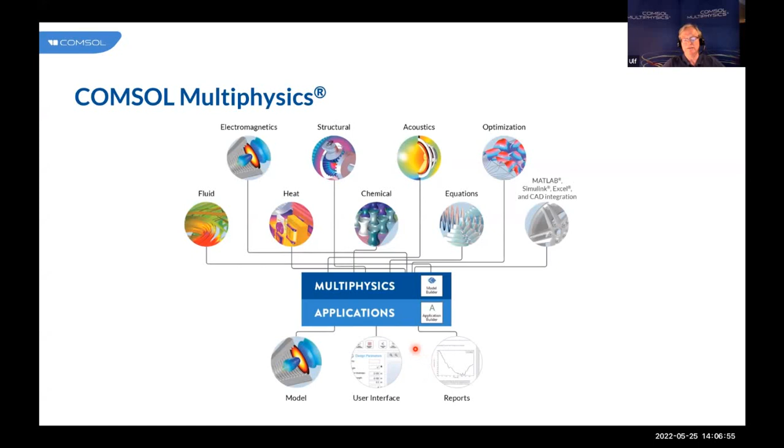So when you use COMSOL, you start with COMSOL Multiphysics, the platform product. And then you add additional products that are suited for your particular application. For instance, from this electromagnetics category, we have the AC/DC Module for low frequency simulations. If you want to go for full wave high frequency simulations, you have the RF and the Wave Optics Modules. If you want to do ray tracing, there is the Ray Optics Module, and then there are the special modules for doing plasma and semiconductor physics.

But as you see, you can combine these electromagnetics modules together with other physics from fluid and heat transfer and structural mechanics and acoustics and even chemistry. And then there are the multipurpose modules that I mentioned, the Optimization Module, the Particle Tracing Module, and then all the different modules that you can use for interfacing to other software tools.

So when discussing the modeling of electromagnetic phenomena, it is useful to divide the different types into the frequency content of your application. So we use the AC/DC module for modeling low frequency applications, like for instance, power engineering, the design of electrical motors. But if we want to model wave propagation and high frequency applications, then we are using the RF and the wave optics modules.

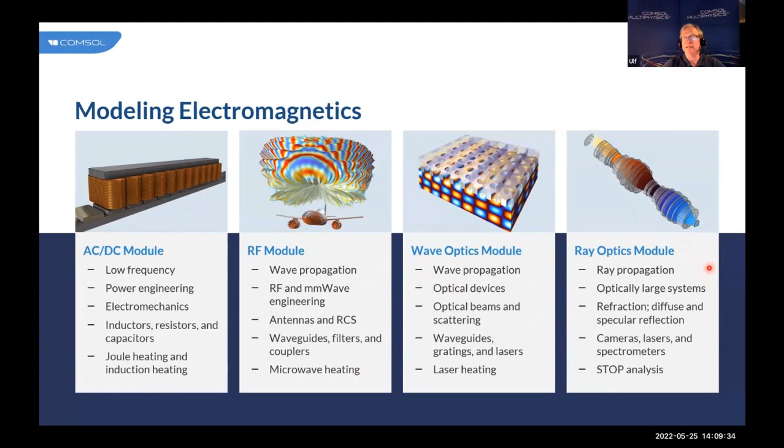So these two modules, they are very similar, but they have different target applications. So the RF module is targeted towards RF and millimeter wave engineering and antenna design, whereas the wave optics module is targeted towards wave propagation in optical devices and applications. Then, if you have large systems compared to the wavelengths or complex geometries, it can be more efficient to do ray tracing, and then you can use the ray optics module instead.

So now, what do we mean when we say wave optics? Well, we mean full wave electromagnetic simulations at optical frequencies. And with optical frequencies, I mean frequencies in the terahertz regime, from a few terahertz to hundreds of terahertz. But we optical guys, we don't like to talk about frequencies. We prefer to talk about wavelengths. And then we say that we work with applications in the nanometer to the micrometer range.

Now, another characteristic of optical application as compared to RF applications is that optical components are often very much larger than the wavelengths. So take, for instance, a semiconductor laser. It can be hundreds to thousands of micrometers long, but still it emits a light at around 1 micron. Or as you see in the pictures here, we have a directional coupler. The length of this device is a few millimeters, but the wavelength of the wave that propagates through this structure is also of the order of a micrometer. So in wave optical applications, we have to handle the situation when the simulation domain is often much larger than the wavelengths.

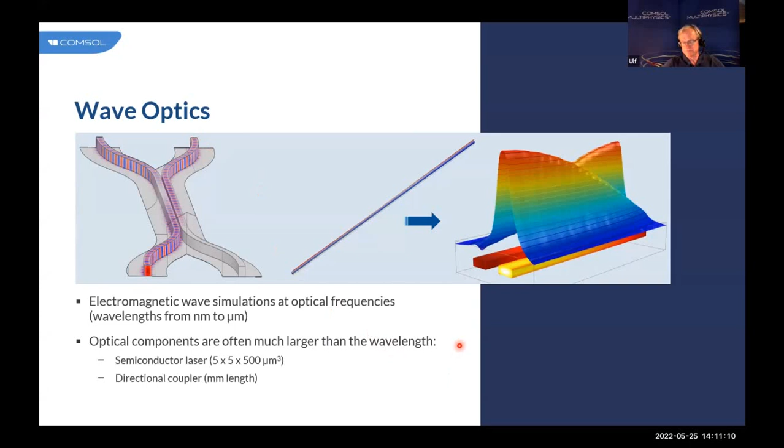Now, if you want to simulate larger domains, then you should go for the beam envelopes interface instead. Here you will have to make a guess of what will be your characteristic wave vector for your problem. It can sound difficult, but for most problems, it's not difficult. But if you can make a good guess of that characteristic wave vector, then instead of solving for the total electric field, we solve for the electric field envelope. So then we can use a much coarser mesh, which makes it possible to solve for much larger domains. I will tell you more about this beam envelopes method later in this presentation. But we use it for wave propagation applications and for applications involving Gaussian beams.

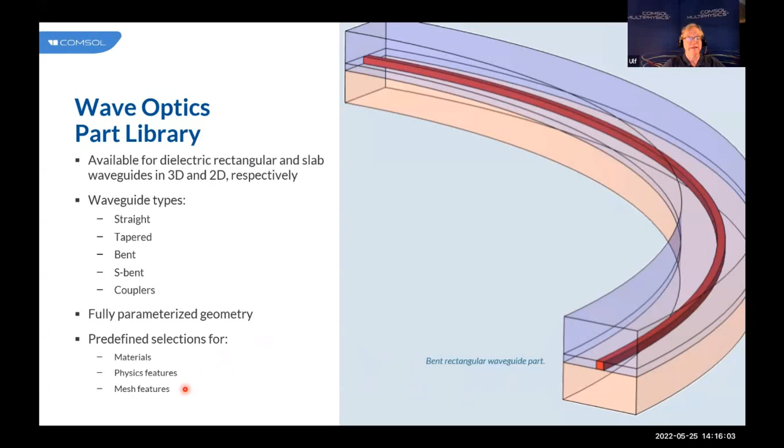Now, the good thing with these parts is that they are fully parameterized, so it's very easy to change the dimensions of these parts. And furthermore, you get some predefined selections. So using these selections, you can specify what will be the core of my waveguide and what will be the cladding of my waveguide. And you can also use them for specifying the boundary conditions that you want to use for your physics simulations. And furthermore, you can use the selections for defining and building the mesh in your problem.

Another really nice thing with the waveguide parts, and especially for the 3D waveguide parts, is that they actually more or less snap together when you add different parts. Because for the 3D waveguide parts, we have input and output work planes at the input of your part and at the exit of your part. And then you can say that you should snap the input work plane of one part with the output work plane of the previous part. So building such a waveguide structure is more or less like building with Lego bricks.

Now in this particular example, we have used S-bend directional coupler parts and straight waveguide parts. And you see a directional coupler down here and another one up here. And then we have connected these directional couplers using straight waveguides like this.

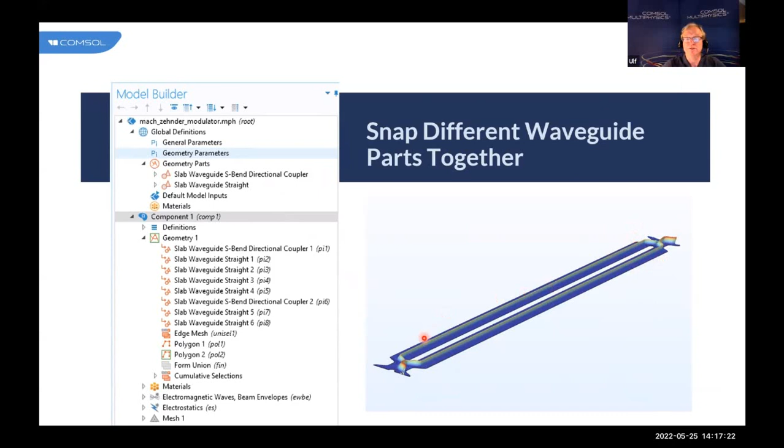So now, having discussed how you build the waveguide structure, we will talk more about one type of waveguide simulation, which is mode analysis. So here we will solve for the mode fields and the propagation constants. So again, what you see here is the total electric field. We say that the total electric field is the mode field times an exponential phase factor where you see the propagation constant beta. And what you solve here mathematically is an eigenvalue problem where the eigenvalue is the propagation constant and your eigenvector is the mode field.

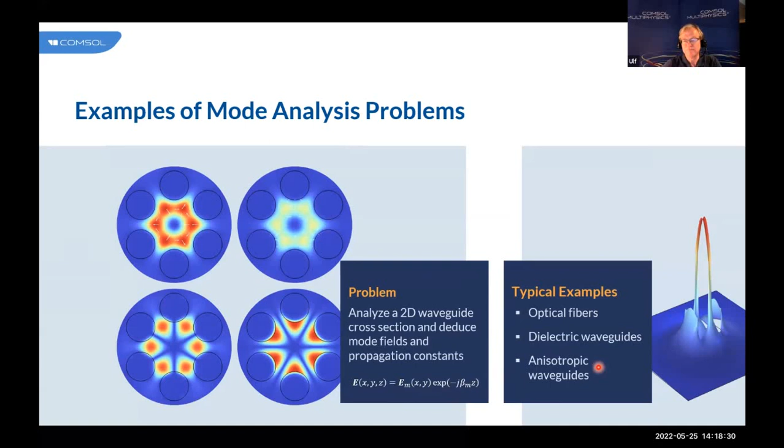And typical applications are that you solve for the modes in an optical fiber or a dielectric waveguide. And you can also do simulations of anisotropic waveguide structures. So a very simple optical waveguide structure is a step index fiber. So in the Wave Optics example library, we have such an example model where we in the first part make a mode analysis for a straight fiber. Whereas in the second part of this example, we do mode analysis simulations for a bent optical fiber.

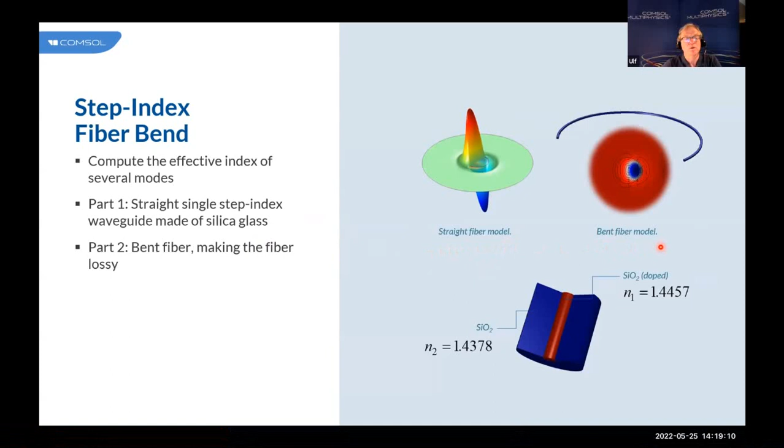So now it's time to make a quick demo of this step index fiber bend model in COMSOL. So here you see the COMSOL GUI. So to the left here you see the model builder window. And with the model builder you build up your model in a tree-like structure. So you define some model components, and under that you define the geometry, the materials, the physics that you are working with, and your mesh. And you also define the studies, and at the end here you find all the result nodes, the graphics output from your simulations.

Now, this model, as I said, consists of two parts. First, we have a part for a straight step index fiber. And then we have the second part for the bent fiber. But I will start talking about the straight fiber.

Now, the modeling workflow in COMSOL is that you most often start off by defining some parameters that are representing your problem. Like you can define the wavelengths and the frequency that is required by the physics and the solvers. You can define material parameters. For instance, in this case, we define the refractive index for the cladding and the core materials. You can define parameters that represent some geometric dimensions. And in this case, we specify the core radius and the cladding radius.

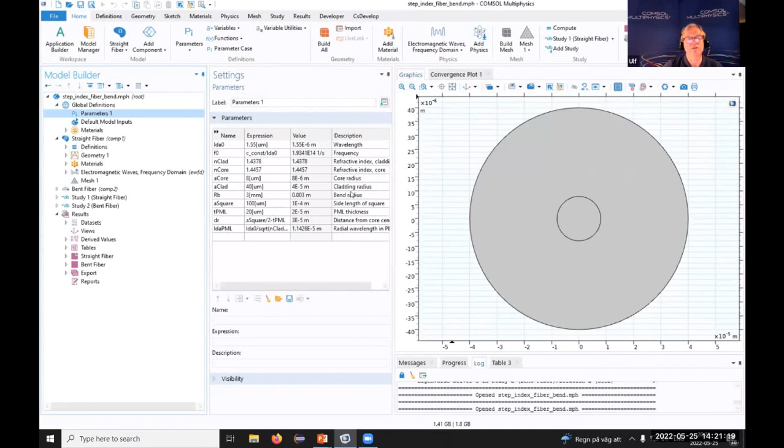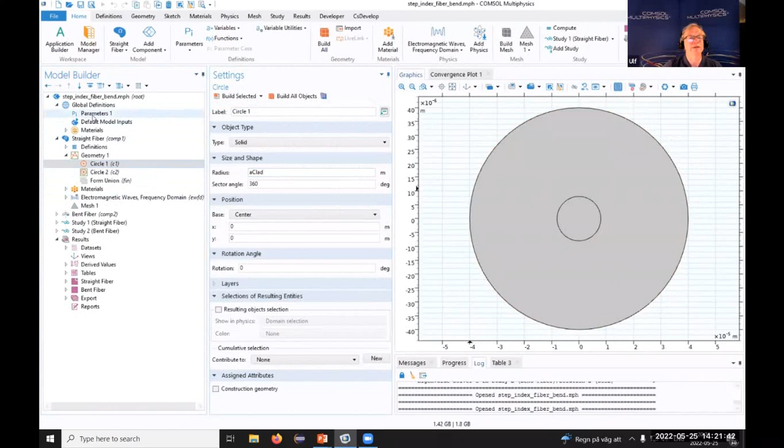So now that we have these parameters all set up, we can start building the geometry. And as this is a very simple model, we have one circle representing the cladding. So this is the big circle. And you see, when we define the radius here, we are using the parameter that we had defined up here. So this will be a parameterized geometry, which makes it very easy to change any of these dimensions if we want to do that. And then we have the second circle, which will be the circle representing the core. And again, we are using as the radius a parameter that we had defined up here.

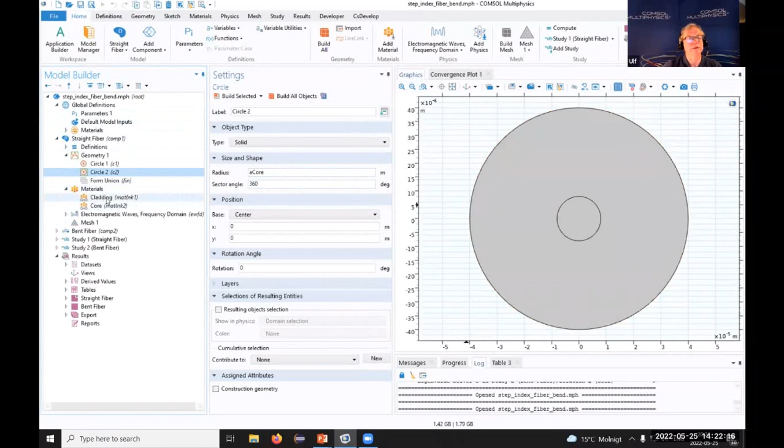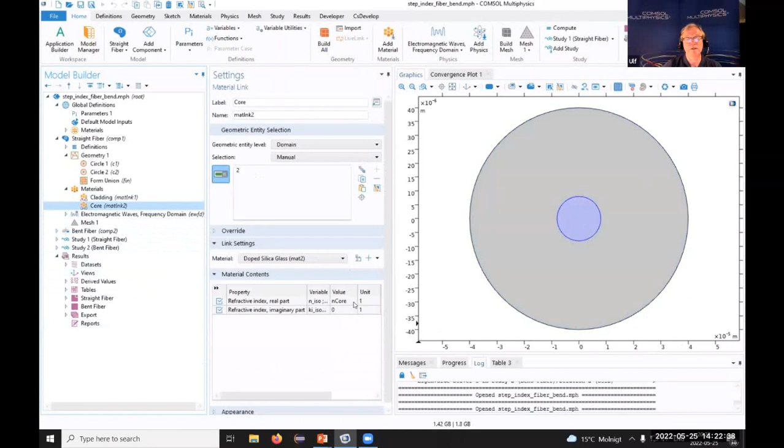Now that we have the geometry, we continue and define the materials. So the blue that you see, that is the cladding, and we use the parameter for the refractive index of the cladding to specify the real part of the refractive index. And similarly for the core, we are using the parameter for the core refractive index. So now also the material is set up here.

So the next thing is to define the physics. And in this case, the physics is very simple. We have the default domain feature, the wave equation feature. So this node represents the vector Helmholtz equation that we are solving for all our domains of this problem.

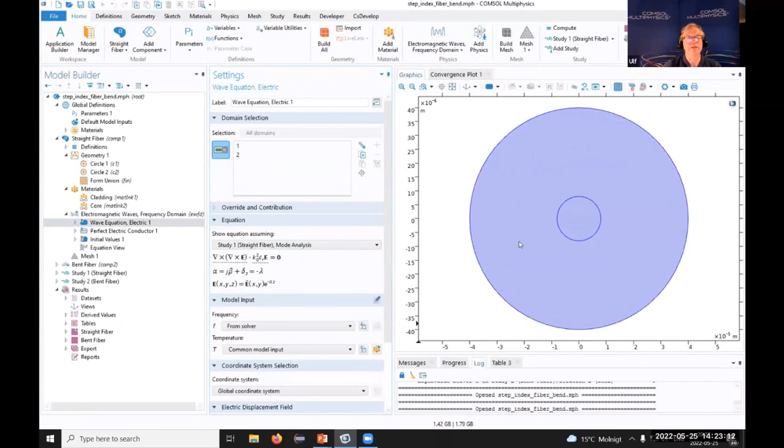Then we also get by default a boundary condition on all the exterior boundaries. And the default boundary condition is the perfect electric conductor boundary condition. And what this says is that we set the tangential electric field components to 0 on this exterior boundary here. Now for this problem, this boundary condition doesn't matter so much, because we will be looking at modes that are confined to be located very close and inside the core here. So what we put here at the boundary doesn't matter much.

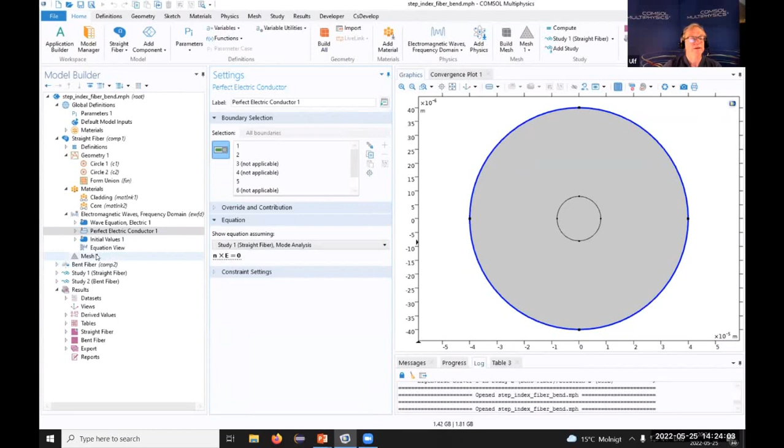Then we set up the mesh. And as you see here, the type of mesh that we will use is a physics-controlled mesh. And this is the standard type of mesh that you use. And what it means that it's physics controlled is that the physics will analyze the geometry and the size and the frequency component and the wavelengths. And then from that information, it will build a suitable mesh.

So most often you don't have to work much with your mesh. You can just use this physics-controlled mesh suggestion. But if you want, of course, you can build your mesh by adding any of the available mesh features that there are on the context menu.

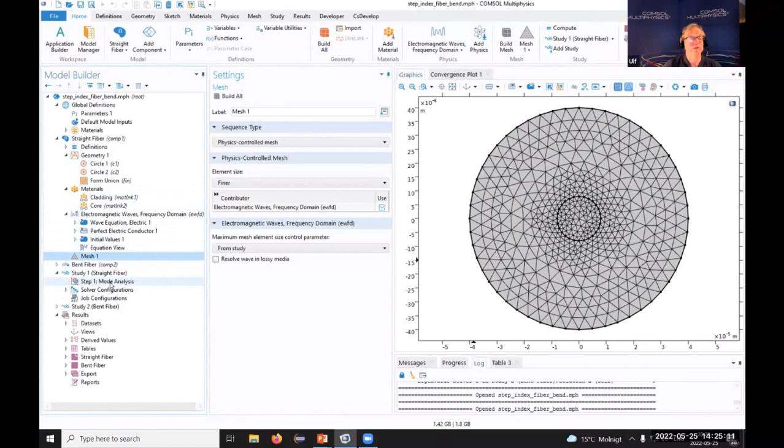So now we have the geometry, the materials, the physics, and the mesh. And the final thing is to define the study. And we are going to make a mode analysis study. So what we need to insert here is the frequency we are working with, but also what modes we are interested in. So here we say that we are interested in modes that have an effective mode index that is close to the refractive index of the core. So then we have everything set and we just click compute.

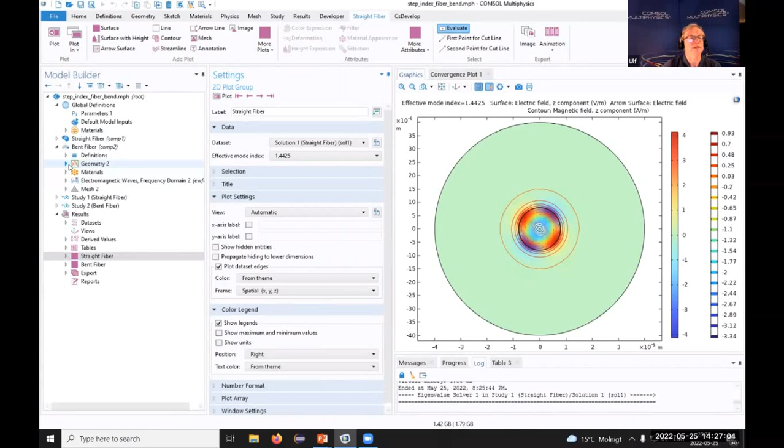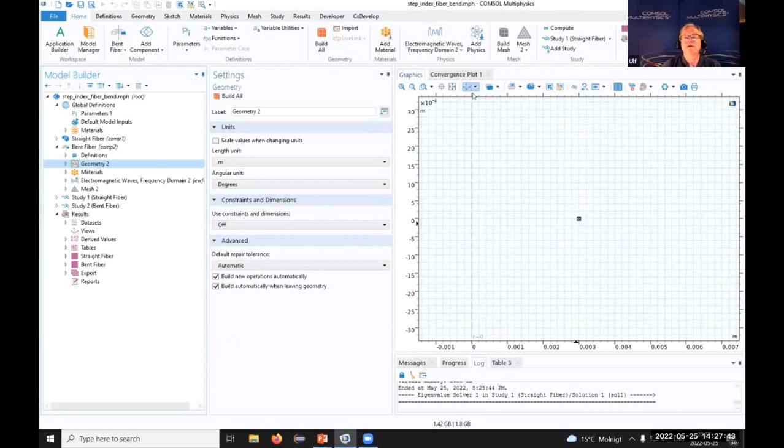Now we go over and look at the example for mode analysis in 2D axisymmetry, or for a bent fiber. So I close this one and I expand this one. So as you see, again, we have the geometry. And if I click it, you see that it looks a little bit different, and there are reasons for that. So let's first zoom out a bit here. So now you see that here is our waveguide structure, but here is the symmetry axis. So this waveguide structure revolves around this symmetry axis. So that is why we say that we have a bent fiber in this case. And now we zoom in again.

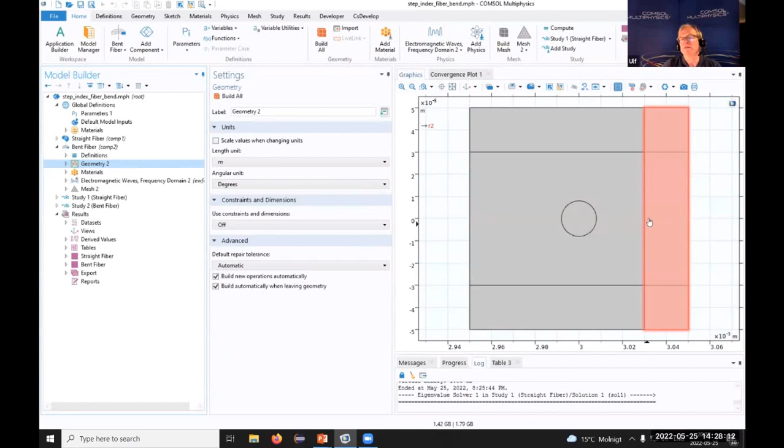So since we have a bent optical dielectric waveguide, this waveguide will actually be lossy. So we will have not only light propagating along the core, but we will also have some radiation that leaks out radially. And now we must absorb that radiation. And to do that, we define perfectly matched layers, and we put them around the inner simulation domain. So now the radiation that propagates radially will be absorbed by this perfectly matched layer.

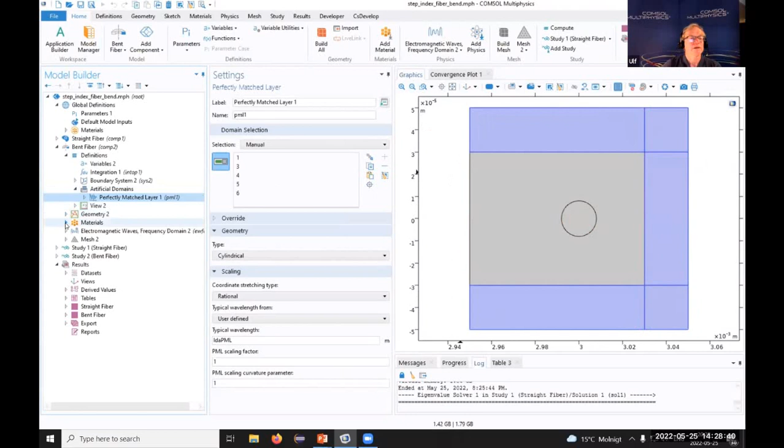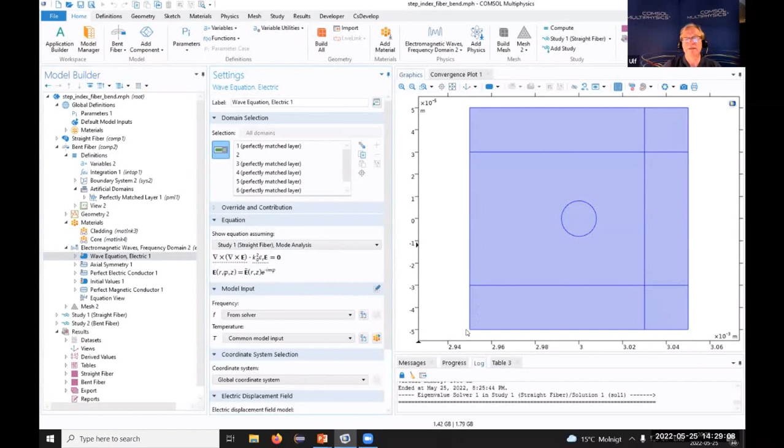And if we look at the materials, we see that everything is cladding material except for the core, exactly as for the straight fiber. For the physics, it is a little bit different, but not much. We still have the wave equation representing the vector Helmholtz equation for the domain in this problem. We have an additional default condition for axial symmetry, because this is a 2D axisymmetric model. But since the symmetry axis is far from our simulation domain, we have no selection on that axial symmetry node.

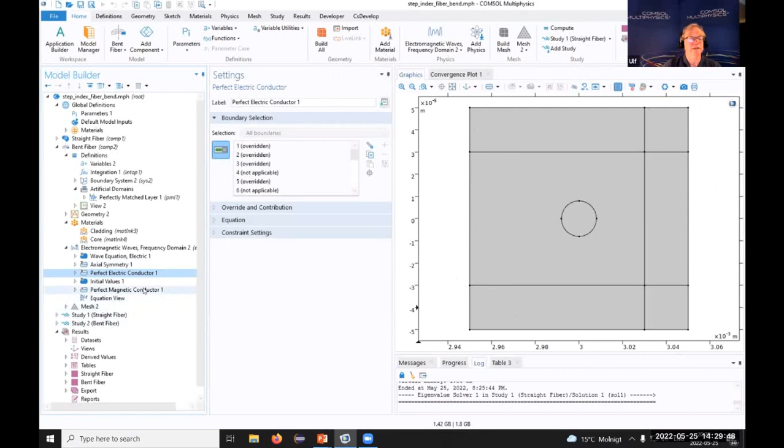Then again, we have the perfect electric conductor, the default boundary condition on the exterior boundaries. But in this case, we decided to override it using the perfect magnetic conductor boundary condition. So here we set the tangential magnetic field components to 0 instead. But again, this boundary condition doesn't matter very much for this mode analysis, since the part of the wave that is leaking radially will be absorbed in the perfectly matched layer, so it will almost not reach this exterior boundary here.

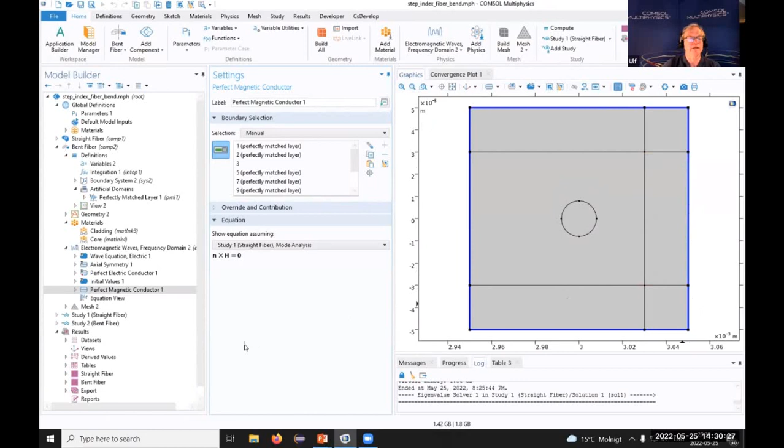And then we have the mesh, and you see that we have a triangular mesh around the core and in the core, whereas we have a structured mapped mesh in the perfectly matched layer regions. And this is how you want to do it to avoid that you get very asymmetrical mesh elements in this perfectly matched layer region.

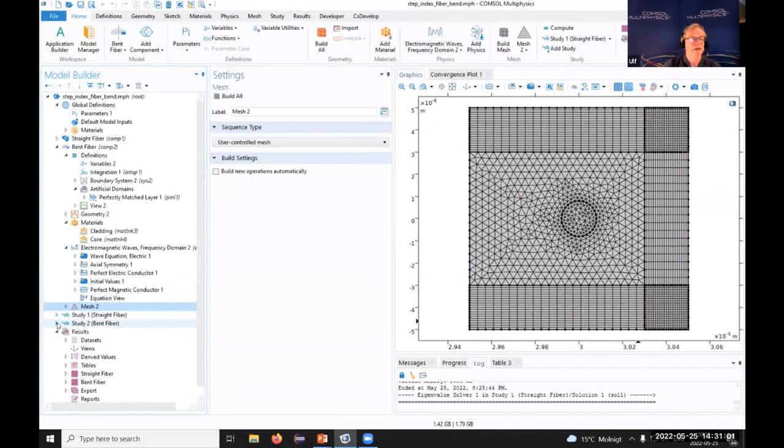And finally, we have to set up the mode analysis study step for this problem too. So again, the same frequency is used. Now the difference here is that when we now do this in axisymmetry, the out-of-plane coordinate is no longer a spatial coordinate. It is rather an angle, the azimuthal angle. And thereby we have to scale the effective index of the modes that we are solving for with a characteristic radius.

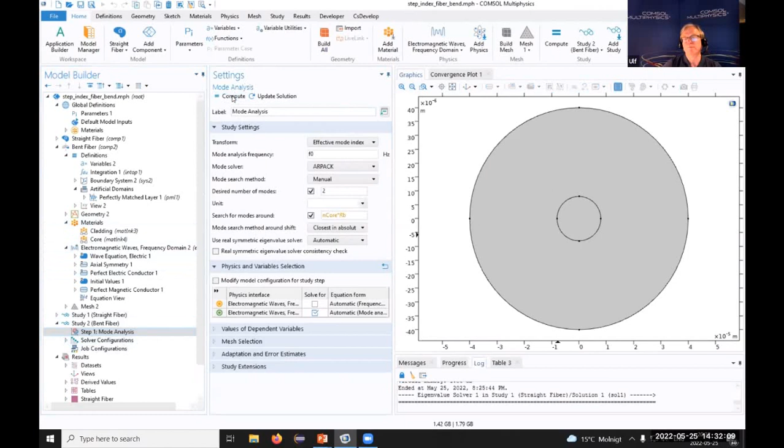So this radius here, it's the radius from the symmetry axis to the center of the core in our 2D axisymmetric waveguide structure. But now everything is set up and we can again solve. And this is the result. So you see here the core boundary. And you see that the mode in this case is not centered at the center of the core, but it's rather pushed outwards radially.

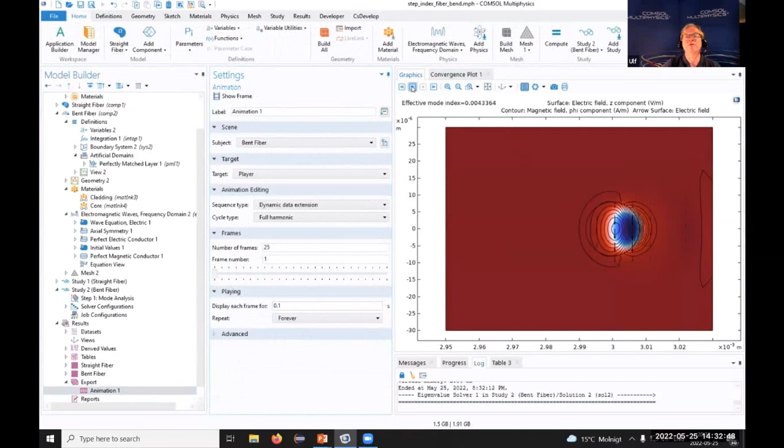And what is also interesting to see is that if we go to the export node and look at an animation, we start this animation here. I hope you can see that there is a wave propagating radially. So this bent fiber is leaking energy radially, and this energy is then absorbed by the perfectly matched layer.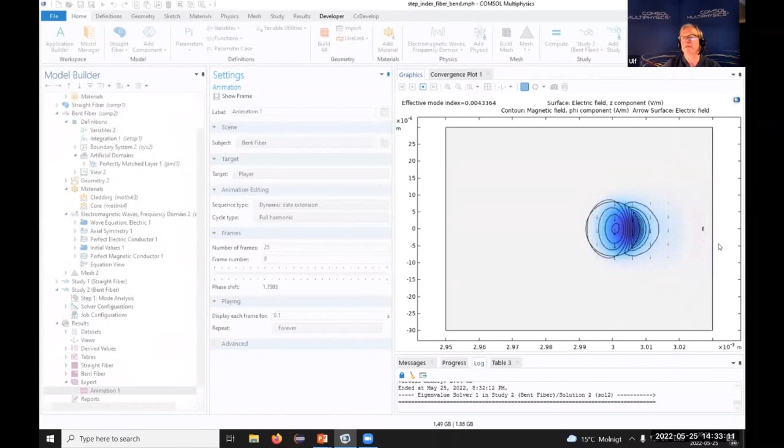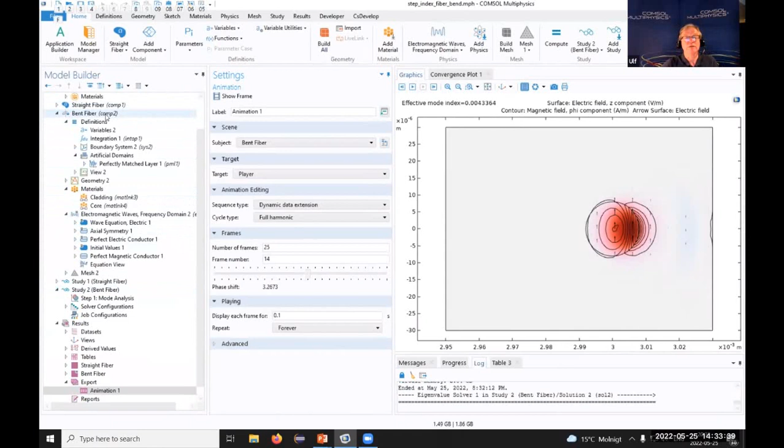So with that short demonstration of COMSOL, you have seen two different types of mode analysis performed. One where we looked at a straight fiber, and one where we used 2D axisymmetry and simulated the bent optical fiber. So with that, I would like to switch back to the presentation. And after this demonstration, I want to provide a few more mode analysis applications.

So in this application, we are interested in the mode fields for a microstructured optical fiber. And this microstructured optical fiber consists of a glass host, but there are 6 air holes inside this glass fiber. And because of the difference in refractive index between the glass and the air, the lowest order mode will be confined to the center of this fiber here. But some of the radiation can actually leak out in between the air holes here.

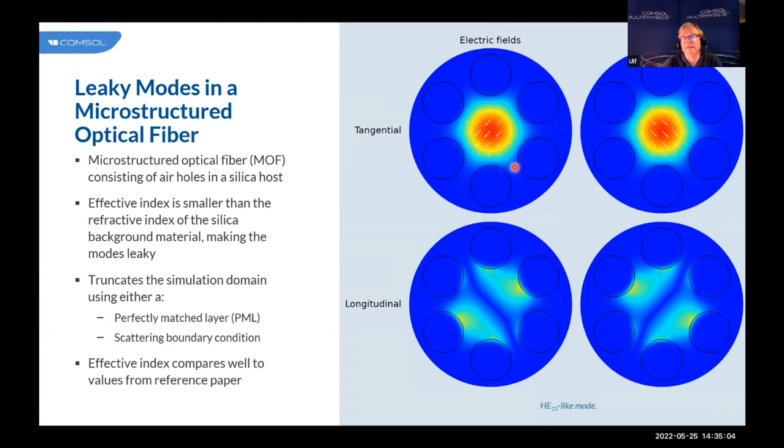So this is an intrinsically leaky fiber, although the leakage is very, very small. But it is important to be able to calculate how much loss you have in this fiber. So what this model does is to use 2 different techniques for calculating this low loss.

Then this is an example of an optical anisotropic waveguide. And here we do simulations of both the case when we have transverse anisotropy and longitudinal anisotropy. And with transverse anisotropy, we mean that depending on the polarization direction in this cross-sectional plane, the wave will see a different refractive index. And with the longitudinal anisotropy, we will have a different refractive index depending on whether the polarization is in the propagation direction or in the cross-sectional plane.

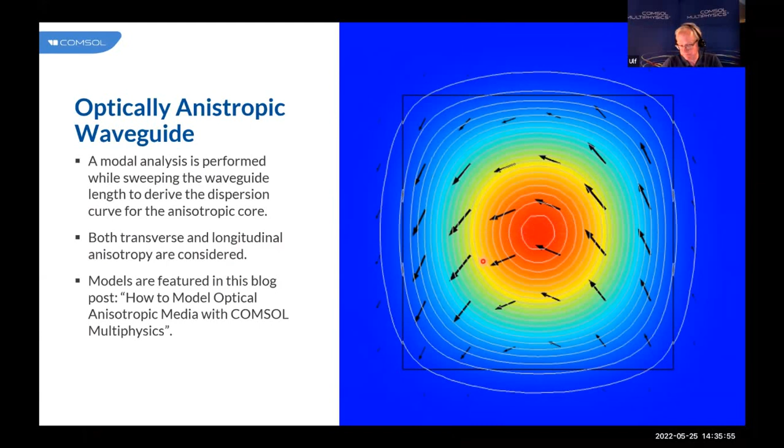This is another example of a dielectric waveguide where we, in this part of the structure, have a fairly large slab with a high refractive index. And then also at the other side, we have a slab of high refractive index. But in between these 2 slabs, we have a very narrow region having a low refractive index. So what happens here is that if we think of the electric displacement field, the electric displacement field is the product of the permittivity and the electric field. And at the boundaries between different dielectric materials, the normal component of the electric displacement field is continuous.

So in the very tiny thin slab where you have a low refractive index, you have a low permittivity. And there, due to the continuity of the normal component of the electric displacement field, you must have a high electric field if you look at the electric field that goes in the normal direction to the boundaries. So in this case, we plot the electric field component in the direction normal to the boundaries. And as a result, you see that you get a large field enhancement. So this kind of a slot waveguide is one way of getting such a field enhancement.

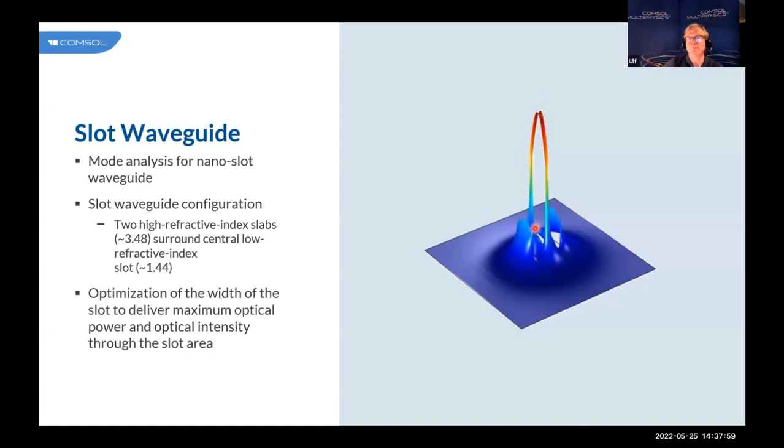This is an example of a multiphysics model. So here we combine structural mechanics with electromagnetic mode analysis for a waveguide structure, where you at the bottom here have a substrate of silicon, and on top of that substrate you have a silica layer. And because silicon and silica have different thermal expansion coefficients, if you heat this structure up, you will mechanically deform the structure. And because of this mechanical deformation, you will induce stresses and strains in the material, and these will induce birefringence or optical anisotropy.

And then we solve for the modes given that you get a different amount of optical anisotropy depending on how much deformation you have. So in this graph here, you see that when you don't have any stress or strain, there are two degenerate modes. But as you induce more stress and more birefringence, the modes split and go to different effective indices.

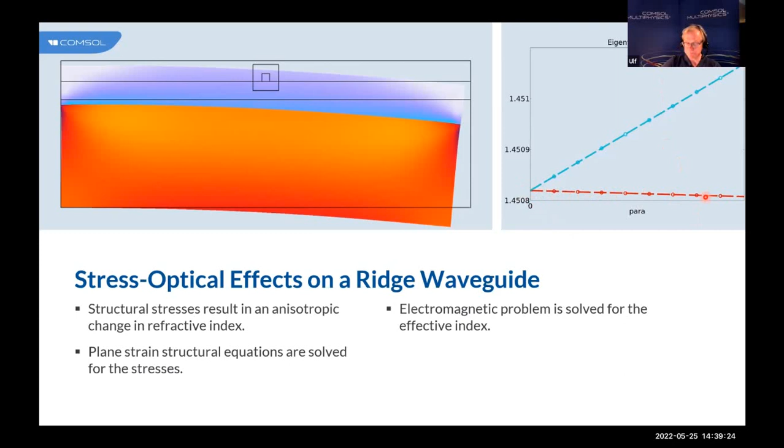So now we have talked a lot about mode analysis. Let's talk about another optical waveguide simulation technique called beam propagation. And here the interest is to follow and see how a wave propagates along a waveguide structure. Now, to start off this discussion, we should say a few words about this beam envelope method. So this picture shows the electric field of a typical wave phenomenon.

And since we are using the finite element method to solve this problem, we have to create a mesh that properly resolves all these oscillations. And that means that we need some 5 to 6 mesh elements per wavelength to resolve this wave phenomena accurately. Now, then you can understand that as we have 5 to 6 mesh elements per wavelength, when the problem domain becomes larger as compared to the wavelength, we will need many more mesh elements. So at some point we risk running out of memory, or that the simulation takes too long to complete.

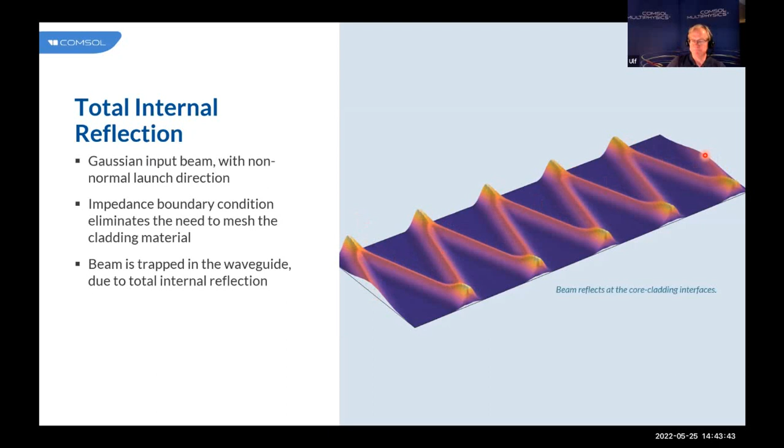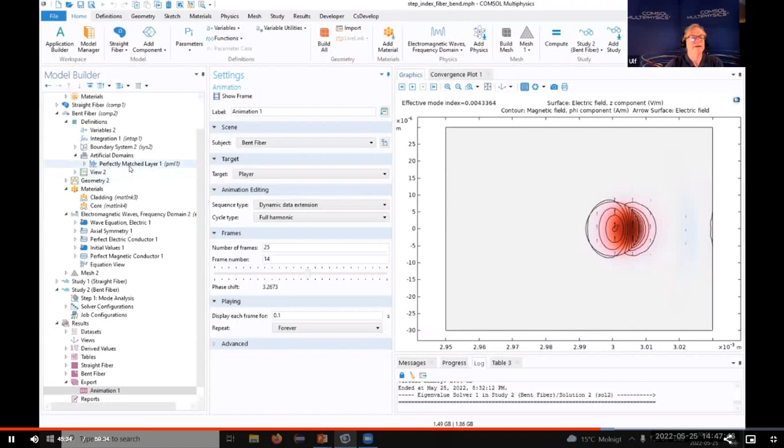Yeah, I can go back to the model here. And yes, for the PML that we have here, what is important to think about is that the thickness should represent a wavelength for the component of the wave that propagates in the radial direction. So since this is a mode analysis problem, most of the wave will propagate in the out-of-plane direction, but we will have a component in the radial direction.

So we have to approximate that radial direction wave vector, and then the wavelength we get by taking 2 pi over that wave vector component. That will be the wavelength in the radial direction that we should use here.

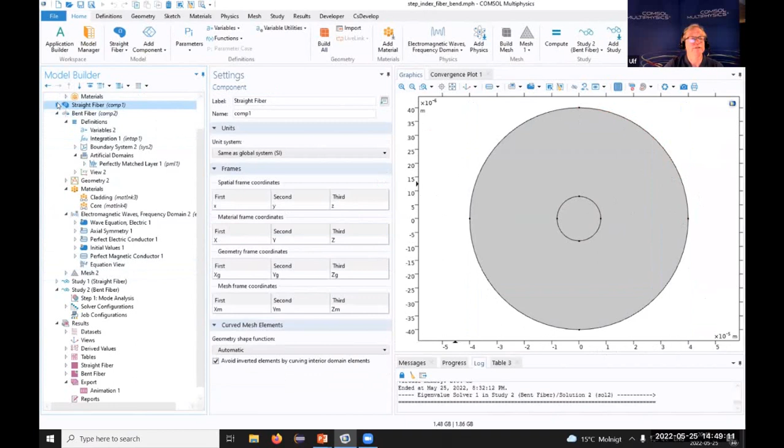And regarding the use of scattering boundary conditions, for the first part, the straight fiber part here, you could use a scattering boundary condition. I can apply it here. And we actually have a special section here that is applicable exactly for the case when we do mode analysis. So if you check this checkbox here,

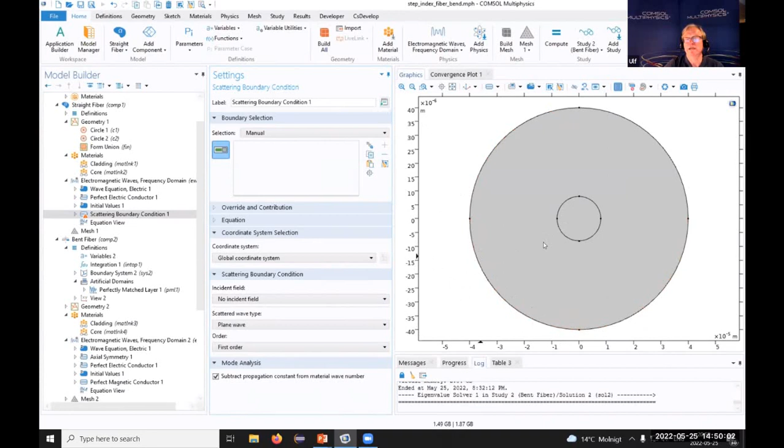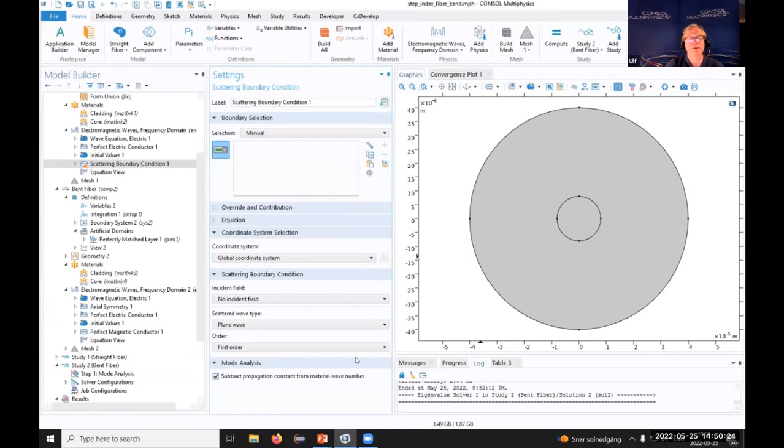then we again do this wave vector calculation. So we calculate the wave vector component in the radial direction, and we make sure that waves that match this wave vector in the radial direction will see this as a transparent boundary. So here we take into account that most of the wave vector will be in the out-of-plane direction. Now for the second case, you could also use the same technique with this setting for the scattering boundary condition. But you have more tuning possibilities using the perfectly matched layer in the 2D axisymmetric case.

All right. There are a couple of questions which may be related to the same thing, but maybe we can repeat it a little so that everyone is clear on this. So folks are confused about why the first model with a straight waveguide had a circular cross section, and the bent waveguide has a square cross section. So why were the extra layers added? Maybe you can comment on that.

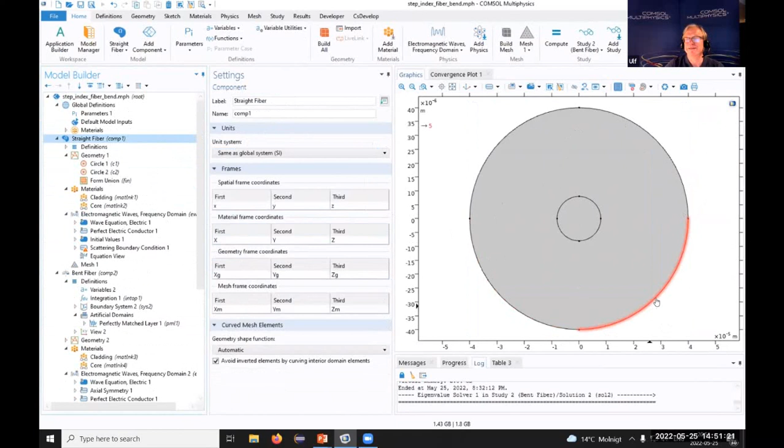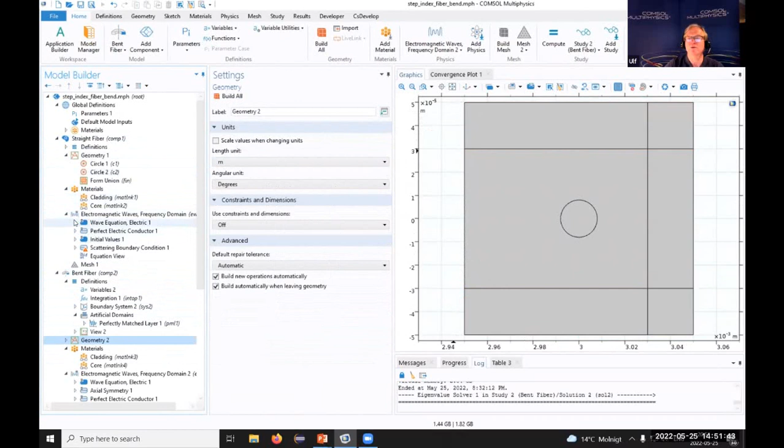Yeah, I mean, for the straight waveguide here, this is how we want to make a simulation of a fiber. A fiber is something that is concentric. The reason why we treat the bent fiber and we build up this rectangular geometry here is because we want to apply the perfectly matched layers on these boundaries here. And it's better in that case to use this rectangular cross section, and then we use cylindrical perfectly matched layers for these boundaries here.

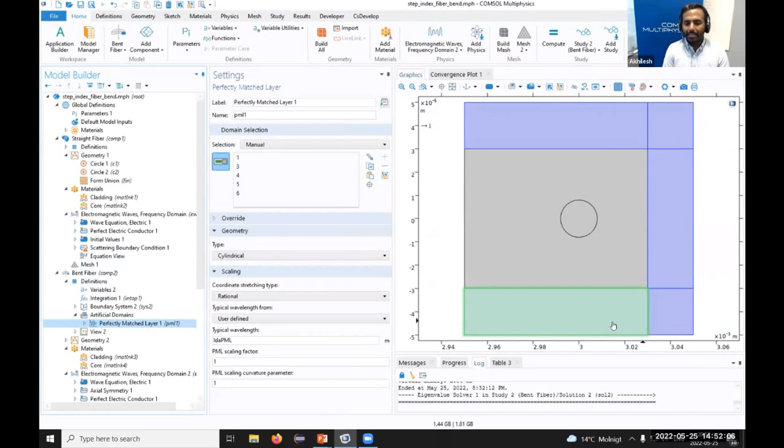Right. Great. So the next question I have here is on capability. So can COMSOL model meta optics? Yes, you can. You can define different types of geometries, different types of materials, and you can also do different types of topology optimization to satisfy a certain design criteria that you would like to achieve.

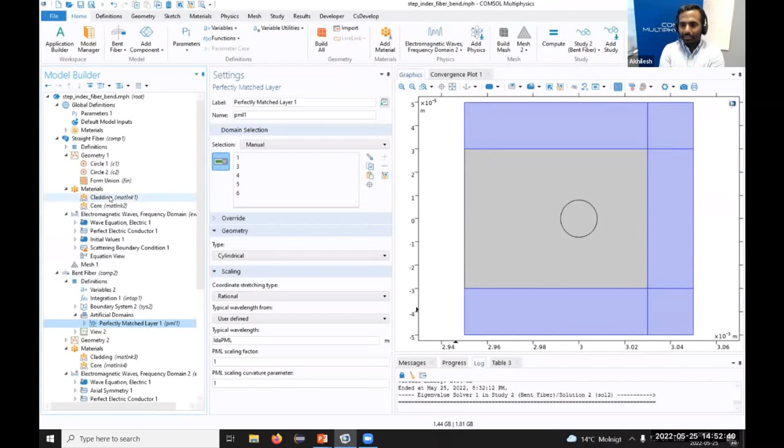I see. All right. The next one is basically asking for a comparison. So what is the difference between COMSOL's transient interface and the FDTD method, finite difference time domain method? Yeah, so the difference is that COMSOL is using the finite element method. And the advantage of using the finite element method is that we can use a more general geometry. The FDTD method is very fast and robust, but it requires more rectangular shapes for the geometry.

I see. Great. So next, I have a couple of questions here on a graded index waveguide. So the general questions are: can COMSOL model a graded index waveguide, and how would we do it?

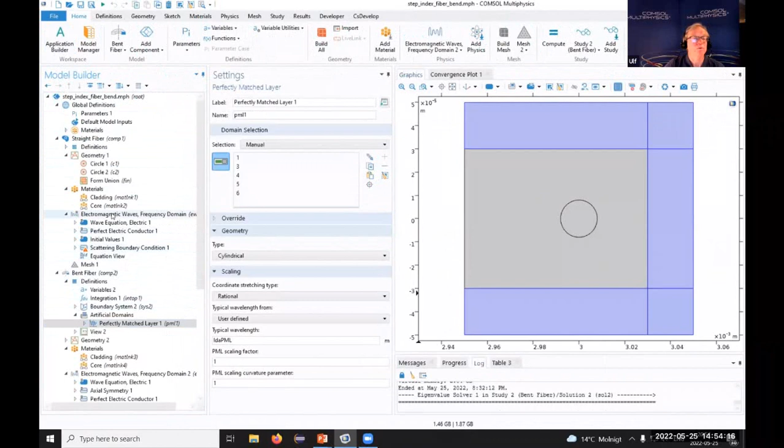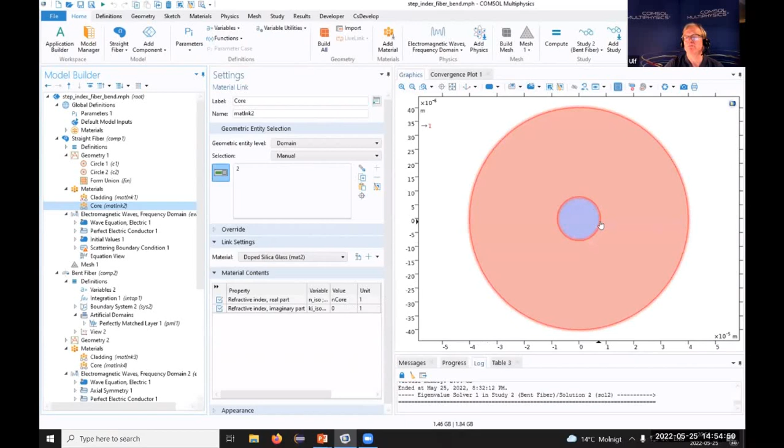We can model graded index waveguides. Sorry, I clicked on the wrong thing. What we would do is to set up the materials here in the core, for instance. And when you specify the material here, you can not only say that it has a certain material, but the material property can have a radial dependence or a radial function, so that you can get the radial shape of your graded material that you like to have.

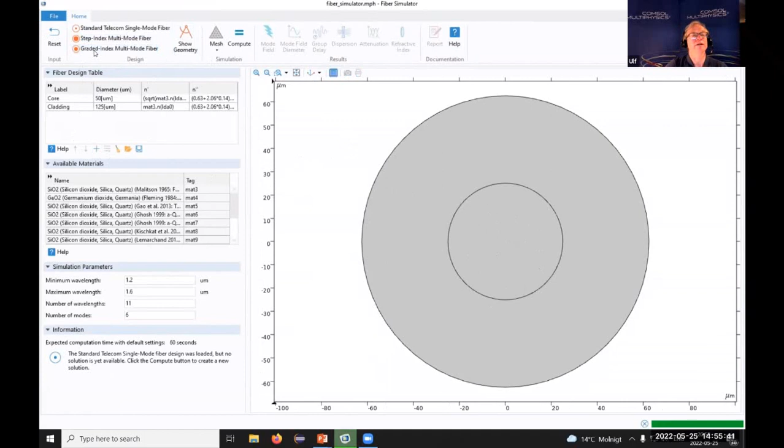And what I was aiming at showing is that we actually have an app that demonstrates this. So I can load this. So in this app, this is the apps that I was talking about, that you can wrap a special user interface around a model. And as you see, you can click on the graded index fiber, and then in this core you will have the radially dependent refractive index. So this will become a graded index multimode fiber.

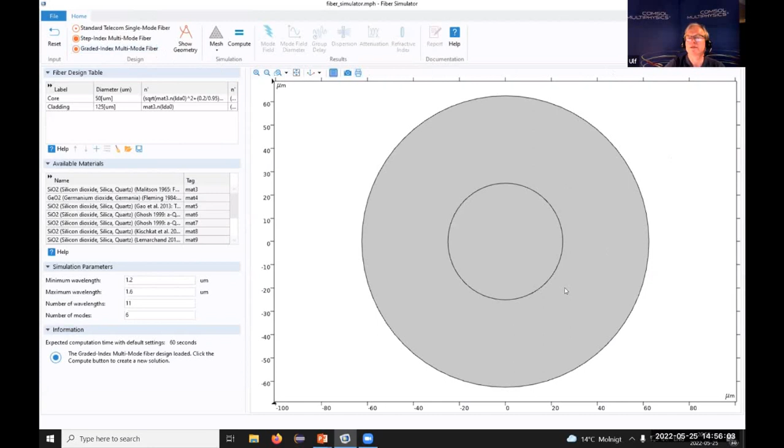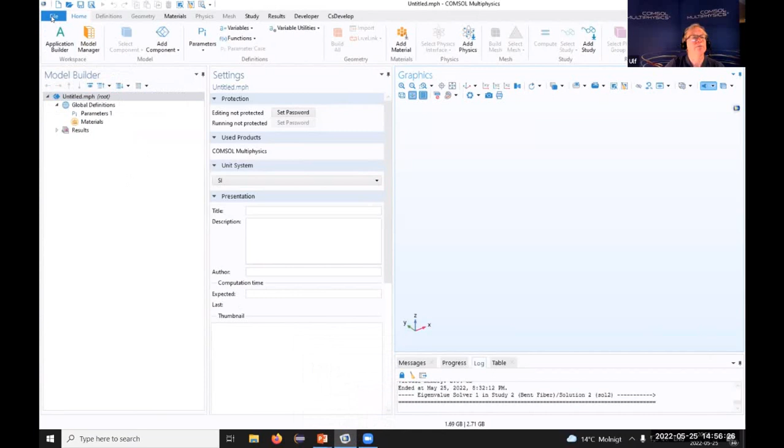Right. Can we analyze evanescent waves using this module? Yes, you can, because we solve for the wave not only in the core but also in the cladding part where we have the evanescent tails. Maybe I misunderstood the question, but in general, we solve not only for the core but also for the cladding part where we have the evanescent part.

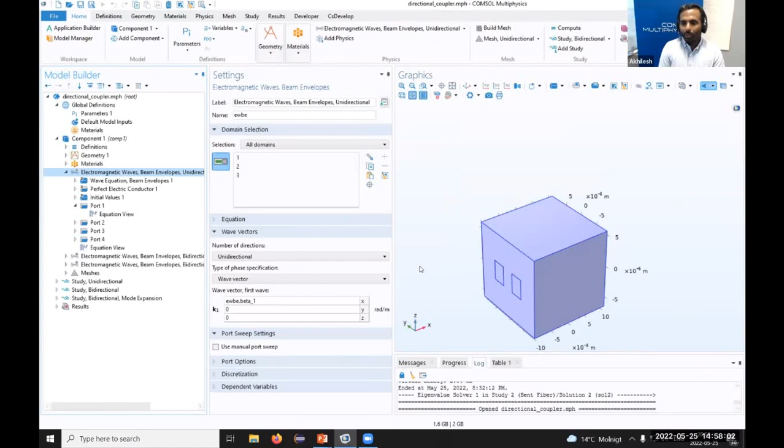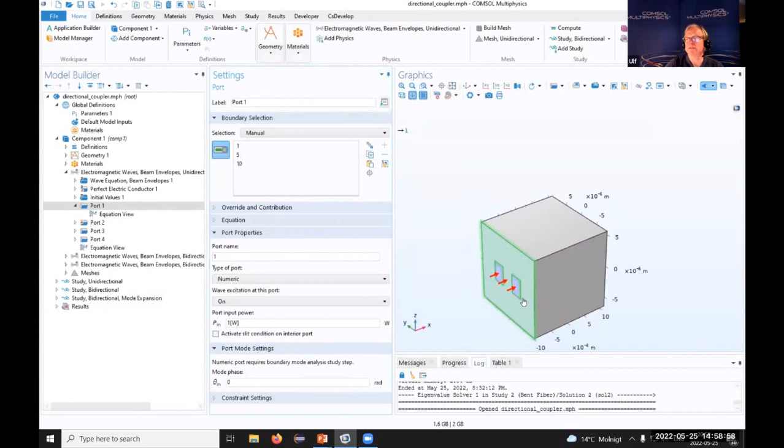Great. The next one is, can you set polarization of the incident waves? Yes, you can. For instance, if you are working with user-defined ports, you can directly specify it here. If we are using numeric ports, so we are solving for the mode fields and the propagation constant, then we have to solve for these modes, inspect how they look, and then pick the proper effective index that corresponds to the mode with the polarization we like to have, and specify that on the boundary mode analysis step here. So this directional coupler model demonstrates how to handle specifying the polarization.

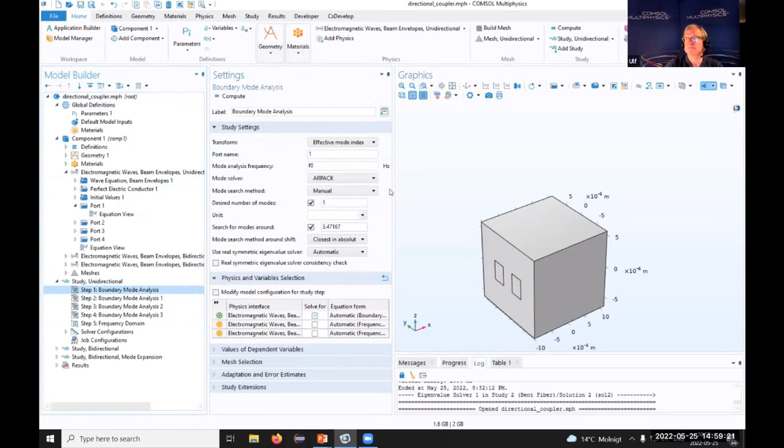I see. All right. The next question is, in the demo we showed mostly 2D models. When expanding this to 3D, what other considerations should they make in terms of modeling strategies? When you go from 2D to 3D, is there anything additional the user should keep track of in modeling waveguides? No, the principles are the same, and the use of the beam envelopes interface is also the same: it's very important to get a good estimate of the characteristic wave vectors or the characteristic phase functions for the waves that you are solving for. In addition to that, there are no principal differences going from 2D to 3D.